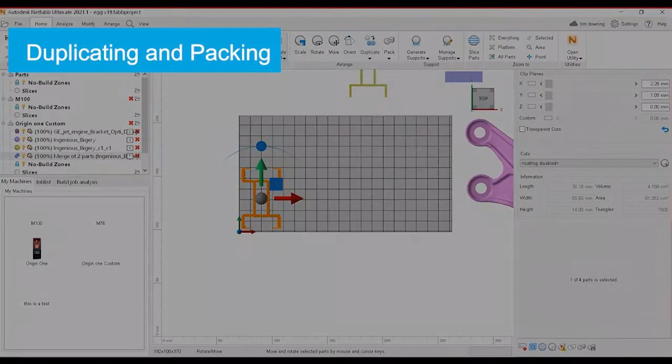Just real quick for duplication before I go back into supports. I typically do rectangular duplicate. In this case, I'm going to fit about 5 in X and only 1 in this orientation in Y. Spacing between parts, if it's a short part, a rigid part, and like a stable structure, you can get away with as low as 2 or 3 millimeters.

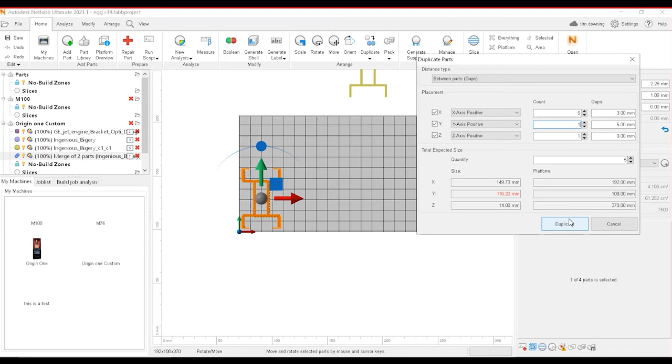Flexible parts, really tall parts, flexible structures, you want to go a little higher. But in general, like as wide as you can, I suppose makes the most sense. You can Control V if you're moving things around. But it looks like we can fit about 8 of these guys.

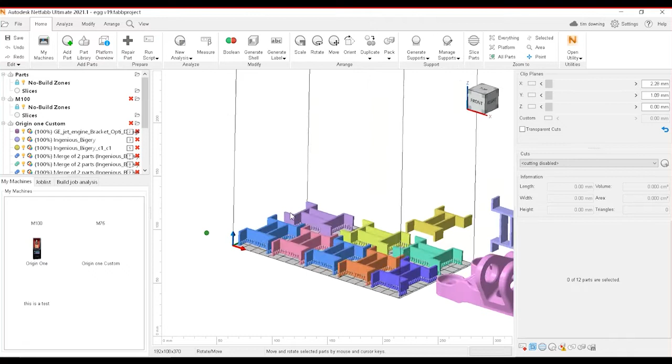So there's my build. There are 2 parts that will print pretty well flat on the build plate. Step 1, when you import your parts, look at them and you have to consider orientation. If there's a big flat surface or a part that has some kind of flat surface, you can park it directly on the build plate. So in this case, the surface that's currently oriented with the build plate is what I'll put there.

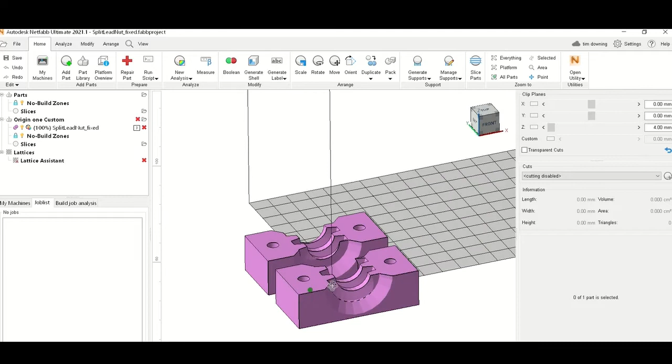So I'm going to move my parts to the center of the build platform. And in this case, I have 2 bodies that are 1 part. And I think I can put those closer together so I can pack more in. So I'm going to right-click, modify, split shells into parts, and remove old parts. Now I have these guys I can move around on their own.

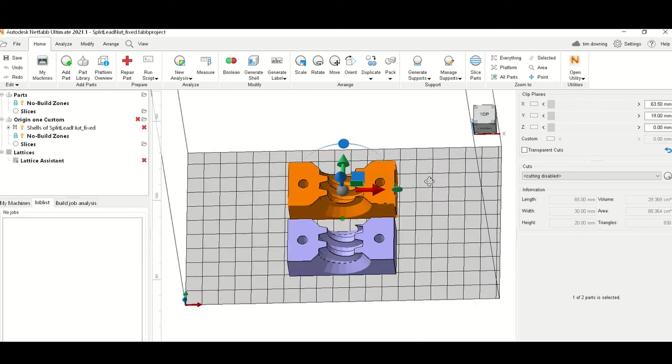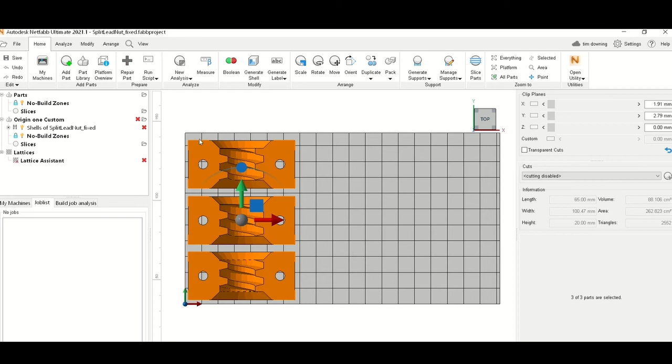So when you click the little box up here on whatever axis or face you want to look from, it'll zoom you there automatically. So I'm going to move my parts to the bottom corner, and I'm going to move this guy about that far away. And it looks like I can get 3 in here. So Control C, Control V, drag that guy to there. Control C, Control V, and bring that back there.

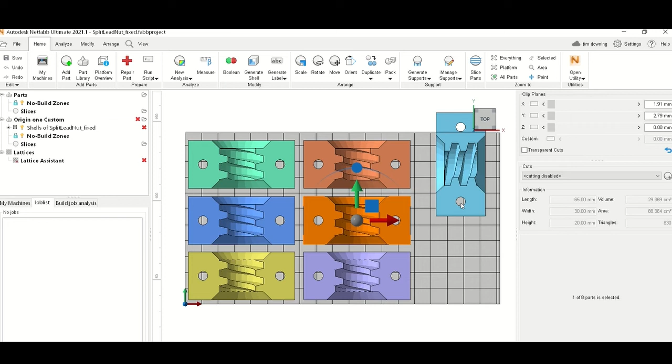And then, so I could do this. It looks like 2 can't fit there. So I'm going to undo, undo, undo, undo. Go back until I just have those 2 parts. So I'm going to think about how I can pack these most tightly. But let's start just by duplicating this 3 times.

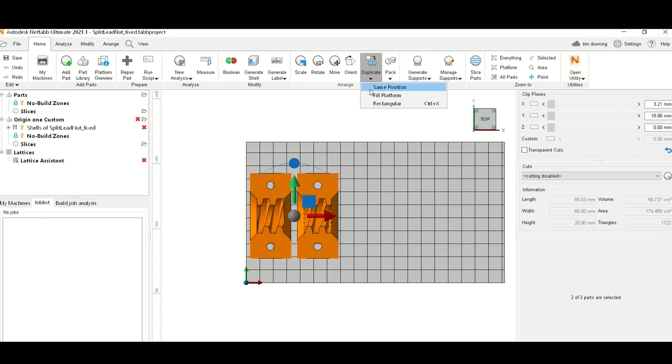You can either Control C, Control V, and drag things over, or you can use this duplicate feature up here, which is pretty convenient. So click duplicate rectangular. Now you're making a rectangular array of these parts. So how many copies do you want in X? How many copies do you want in Y and Z? In this case, I'm going to do 3 copies in X, only 1 in Y. And I'll make them 4 millimeters apart, which is a little more than that. It's probably 3.5.

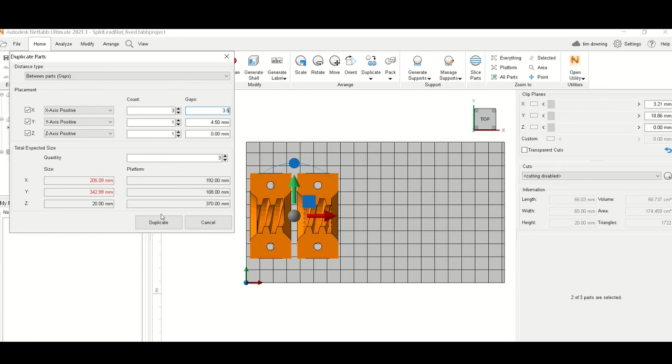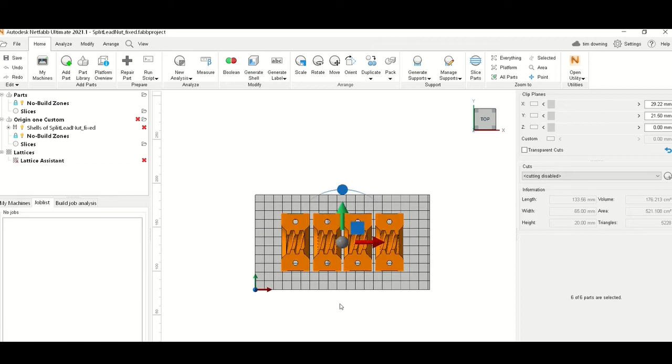So there you go. I'm going to select all and look at my length and width over here. You see it's 205, which is more than the 192 build volume. So I'm going to take away that. I could just delete 1 set, but let's just do this for now. I'm going to move these to the center of the platform. And this would print totally fine. I do think I could fit a couple more in, and I'd like to try.

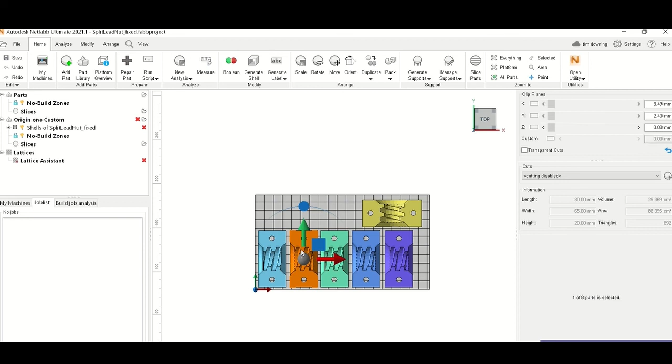In this case, these are 2 halves, 2 apart. So having an odd number really doesn't make sense. But for the sake of this exercise, we can leave it there. So this part will print fine. There are no overhangs, no islands. There's a big flat surface to put on the build plate.

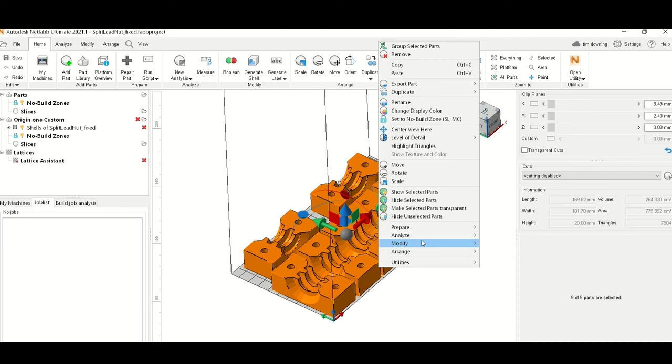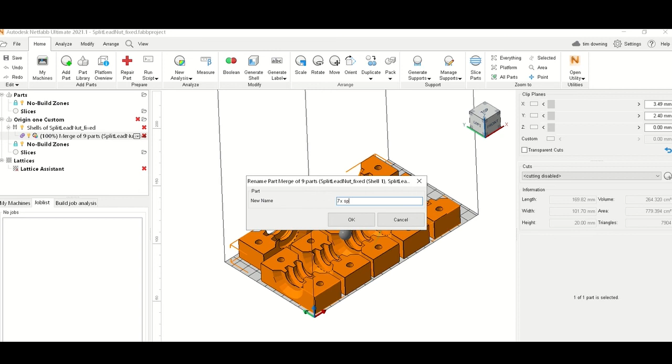So my last step, I'm going to Control A, right click, modify, merge selected parts. Now all my parts are 1, and it's good to export. Select the part, right click, export, STL. Sometimes when you merge things, it makes a long name. You have to rename it something short. Right click, export as STL, same folder.

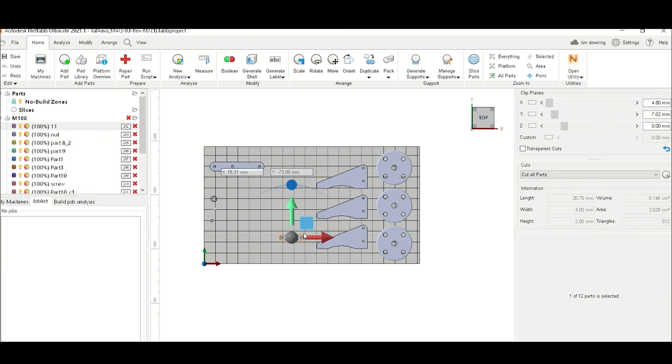I'm going to duplicate this only in Y and do 3. Bring this one down here. Do the same thing. And I'm going to add some more spacing just because it fits. And if I'm trying to pack them as densely as possible, I can either do a Netfabb packing algorithm, which I don't always trust, or just think about it manually a little bit.

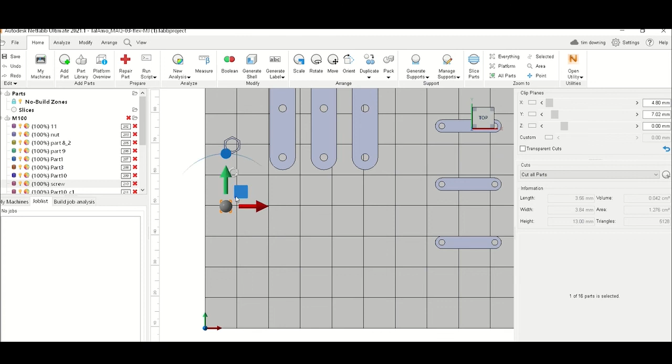Now these ones, small parts, use all at the same time. Now this print will be good to go.